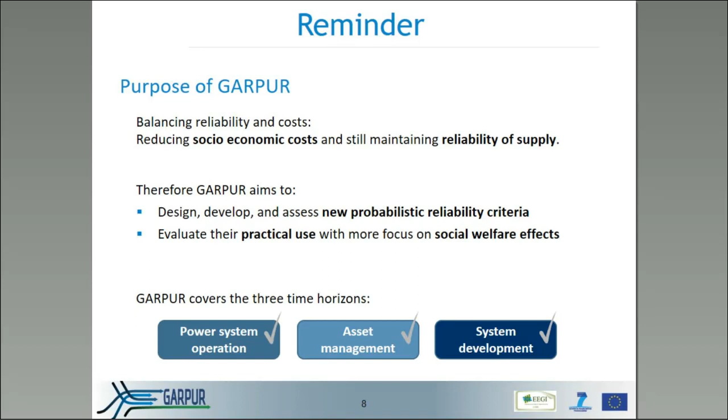I should also recall that the goal of GARPUR is to cover in a coherent way the three main types of contexts where reliability management is carried out by TSOs, namely power system operations, asset management, and system development. These problems span different time horizons, from very short-term real-time operation to rather long-term, for instance in system development.

This slide summarizes the overall approach of GARPUR. You see in the upper part the development of a probabilistic reliability management framework, and in the lower part the development of a socio-economic impact evaluation framework. This should be applicable over the three contexts I've just mentioned: system development, asset management, and power system operation.

In the project, we have developed new criteria and also a prototype quantification platform. One of the pilot tests, presented later on by Pascal, is based on using this quantification platform in order to compare, from a socioeconomic point of view, the N-1 classical reliability criterion used today in practice with the new probabilistic approach developed in GARPUR.

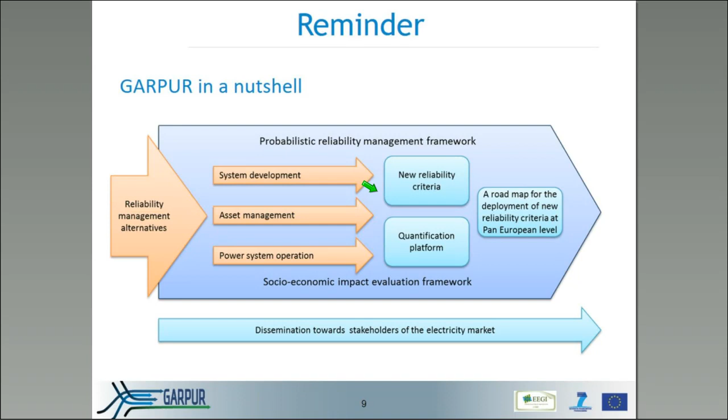Finally, based on these developments, the GARPUR project has developed a roadmap for the deployment of new reliability criteria at the pan-European level, and the last part of the presentation will focus on a very quick summary of that roadmap. So

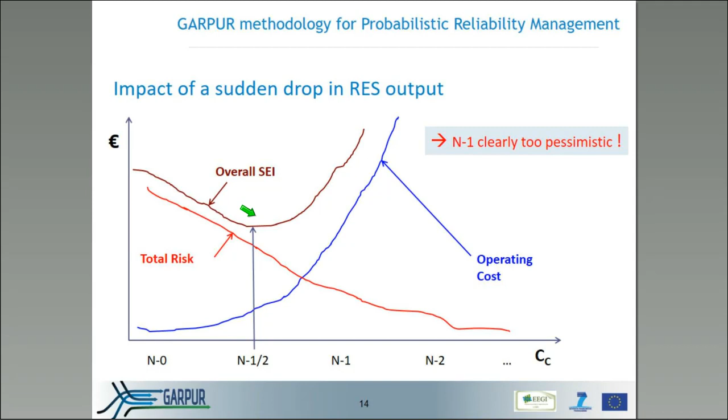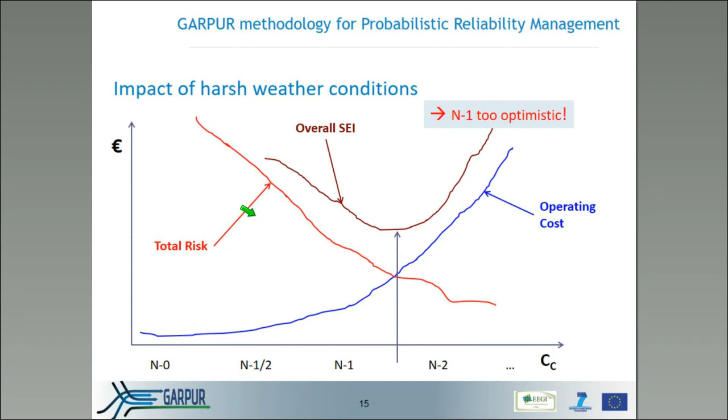And of course, in extreme weather conditions, the probability of multiple failures will increase, and also if there is an interruption, the consequences on the consumers who have no electricity will typically be worse if the weather is harsh than if the weather is mild, so that the total risk curve, the red curve, strongly increases, and in this case, the N-1 criterion would be too optimistic, and you should rather add more contingencies to reach this optimum trade-off. So the bottom line is that depending on the conditions, in some cases we should cover less contingencies than N-1, and in other cases more contingencies than N-1.

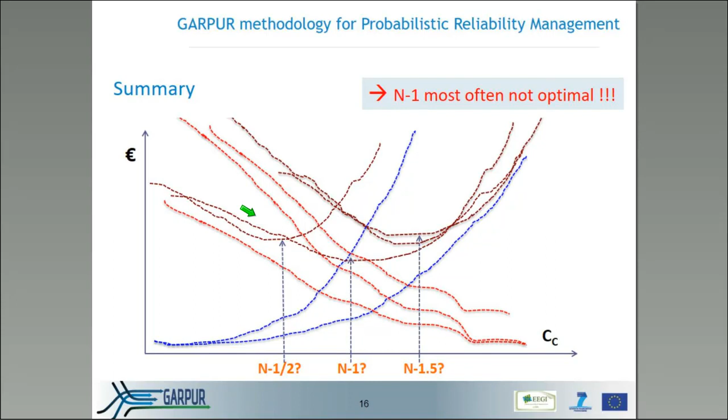So the GARPUR project has developed a coherent methodology which allows to do this in such a way that we approach this socioeconomic optimum. So the main conclusion is that we need to dynamically exploit all the information that is available in the particular context, for instance, in real time. And this information has to do with evaluating the socioeconomic cost of service interruptions, but also with probabilities of contingencies and other kinds of failure modes, hidden failures, for instance.

And also because in operation, more and more, there is a combination of preventive and corrective control used to operate the system, it's important to take into account the fact that corrective controls, which are taken just after the occurrence of a contingency, are taken under strong time pressure, and there might be some risk of failure of corrective control, so that even if everything was well prepared, the system is not able, in the end, to withstand the contingency. So that also has to be taken into account.

And various factors will influence these probabilities and these costs, like weather conditions, of course, operating conditions if the system is in more stressed conditions, and also the fitness of the assets of the system. If you have well-maintained transformers and lines, normally their failure rates will be smaller than if you have less well-maintained lines. And so this already shows that asset management, and maintenance in particular, may have an impact on reliability in operation, and this should be taken into account as well.

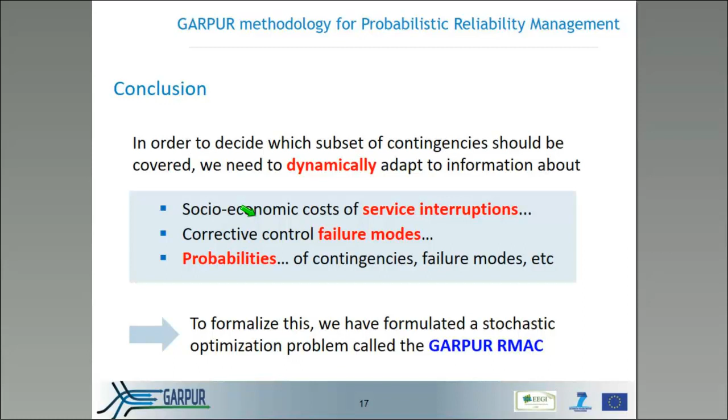Without going into any mathematical formulation here, which can be found in our many deliverables provided in the project, this led to the formulation of a series of stochastic optimization problems called the GARPUR RMAC.

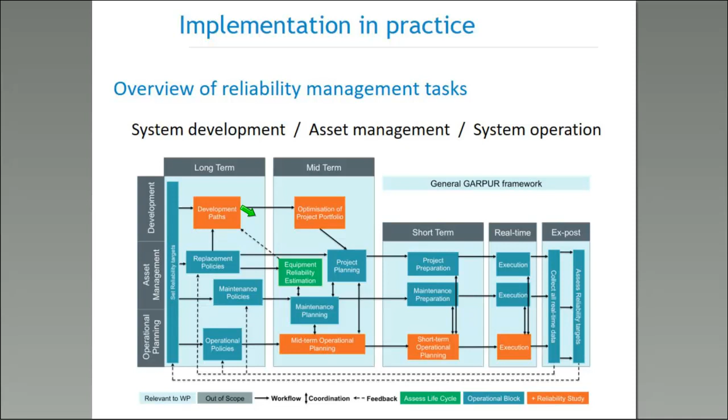These can be applied to the different problems that the TSOs have to solve, from system development, asset management, and system operation. I will discuss each one of these contexts and what problem is addressed.

Starting with system development, the main purpose is to identify transmission capacities needed in the future and justify how we propose to provide them through a careful cost-benefit analysis. What kind of additional line should be built, and what should be its capacity? The larger the capacity, typically the better from the market and reliability point of view, but the higher the investment costs.

The problem setting is that you look at a target year or series of target years over the future, say from 2025 to 2035. Then you screen the relevant future market and operating conditions over that horizon, identify possible bottlenecks in terms of market and reliability issues by simulating how the system would operate, and from there determine, thanks to the expertise of planning engineers and the results of these screening studies, whether and where to build new lines.

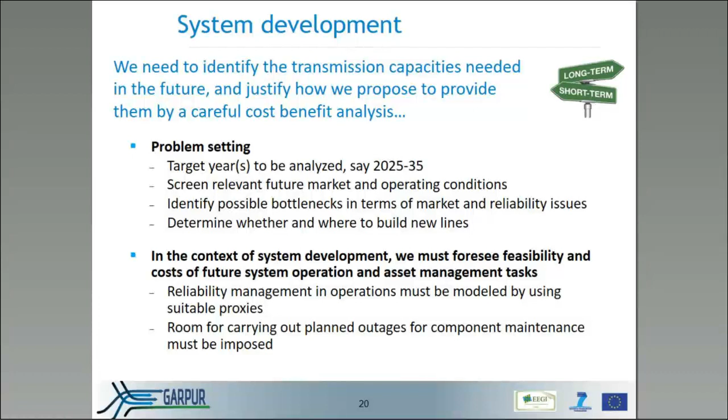When carrying out these system development studies, it's very important to model in a suitable way how the system would be operated over these future years and also how it would be maintained. In GARPUR, we do that modeling by introducing the concept of a proxy. I will come back to this during the next two applications.

Quickly, on asset management, which is a very important activity, especially because power system components come closer to their end of life. Most of the lines and transformers in the transmission system are already several tens of years old. So it's quite important to analyze how much and where to invest in maintenance and replacement - how often should we do the maintenance and where should we do it in the best way, and also the replacement of some of the older equipment.

Once you know how much of these activities you want to plan for the future, maybe 10 or 20 years ahead, you also have to be able to carry them out, which means taking some equipment out of operation for maintenance or replacement activities. While these activities will, after being carried out, typically increase the reliability of the system, during the outage the reliability level of the system goes down.

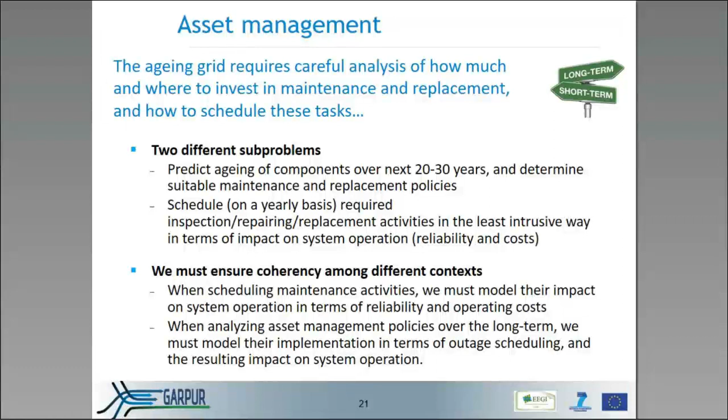And finally, the last class of problems on which we have, of course, worked concern system operation, where the question is to take decisions in operation planning maybe a few hours or a few days ahead in time, up to real time. And in this case, the point is to optimize the balance between operating costs and the risk of power supply interruptions, as I have explained in my first set of slides with my 3 types of curves.

And so here we have looked at 2 sub-problems: the real-time operation problem, where the point is to take into account current operating and weather conditions to evaluate risks of power supply interruptions over a relevant set of possible contingencies and to mitigate them. And in look-ahead mode, operation planning, where the point is to prepare real-time operation to ensure robustness with respect to uncertainties in load, renewable in-feed, market, and weather conditions.

So there, in look-ahead mode, you can still postpone some maintenance, some outages planned for maintenance, or you could possibly reduce the capacities given to the market if you think that the weather conditions will be extreme and it is better to reduce a little bit the distance from generation to consumption.

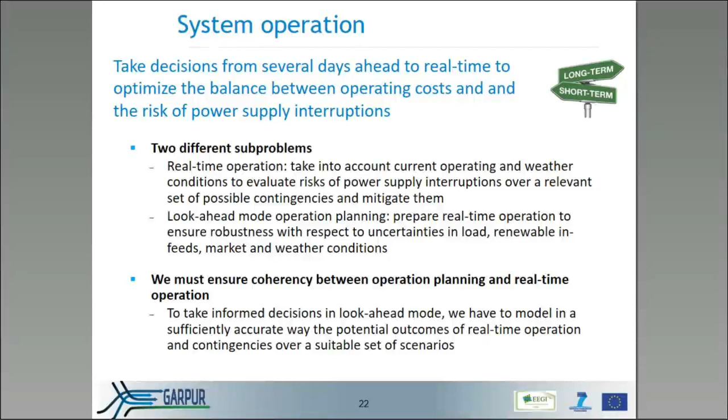So this finishes my introduction with the following slide, where these different Russian dolls basically represent the different contexts. Let's say from the extreme right part, where we have the automatic response of the system, and then we have real time going progressively towards the left part of the slide. Real-time operation planning, maybe midterm outage scheduling, and so on.

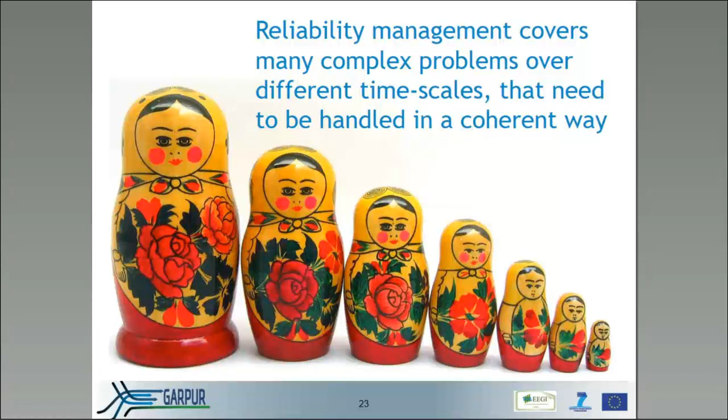In this webinar, I will quickly go through the results of the Landsnet pilot test by answering these 3 questions. So is the computation fast enough? Does the output make any sense? And how sensitive are the outputs?

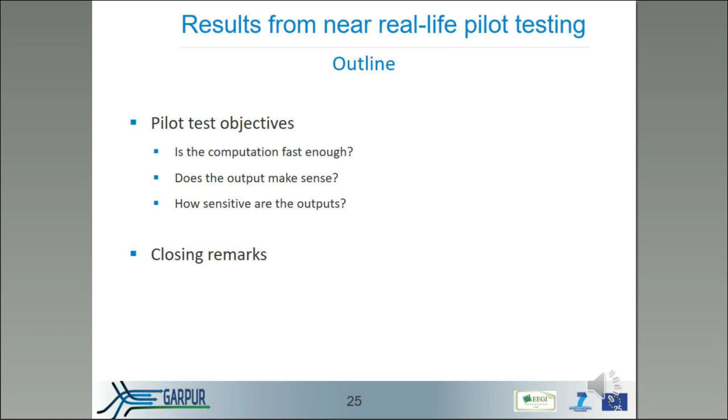Description of the pilot test implementation and methods can be found in detail in the first webinar of this series. But here is a short overview of the Icelandic system and the model. The Icelandic system is small and thus manageable for a pilot test like this. The model we used contains 85 buses, 107 branches, 71 generators, and it has 65 loads.

The pilot was programmed with performance in mind from the start, but not maybe optimized, since we felt it was more important that it would work and be simple to debug and validate the outcome. The pilot was built in MATLAB using MATPOWER and IPOPT, with additional auxiliary tools made in Python, and outputs and displays written in HTML and JavaScript.

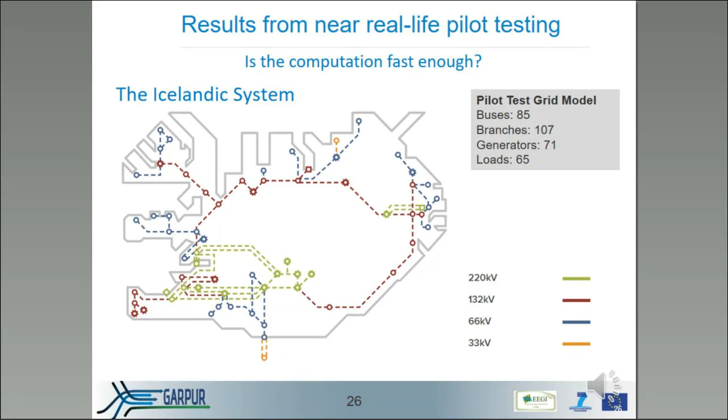For computation, we used a normal desktop computer. Here are the specs for the computer we used. It has 10 cores and a larger memory, but we can say it's a reasonable personal computer.

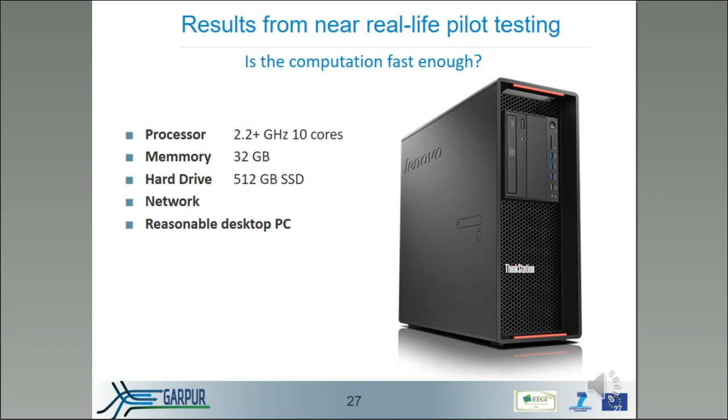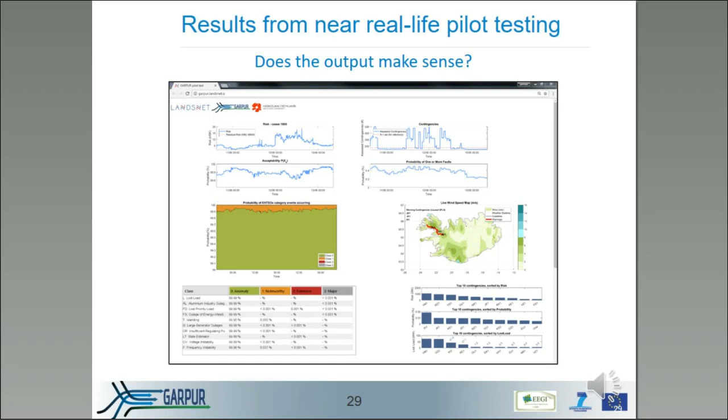To visualize the outputs, we developed an internal web page which is accessible for everyone within Landsnet. When we started this pilot test, we really didn't have a good feeling of how to represent the outputs in a meaningful way to the operators, and it was difficult to view this picture quickly. And after a while, we found that the best way was this graph here, for realizing the present state of the system.

The y-axis shows estimated interruption costs, and x-axis hourly contingency probability, with risk as contours on the graph. The map shows the 10 worst contingencies, and it's really easy to compare each one of the contingencies and see where you're at each moment. And here the operator can see the impact of, for example, an incoming storm, where the blocks start to move to the right on the graph.

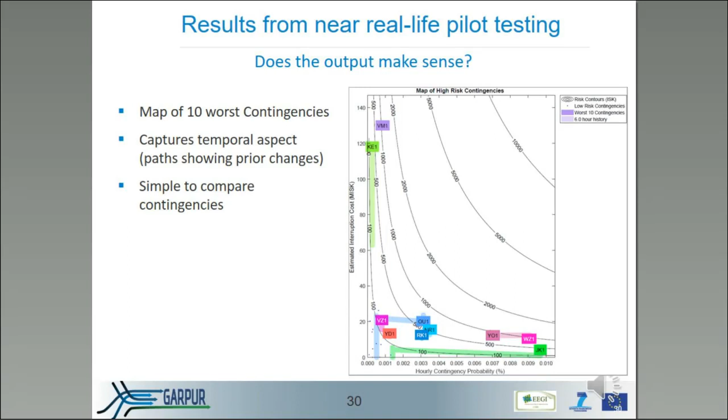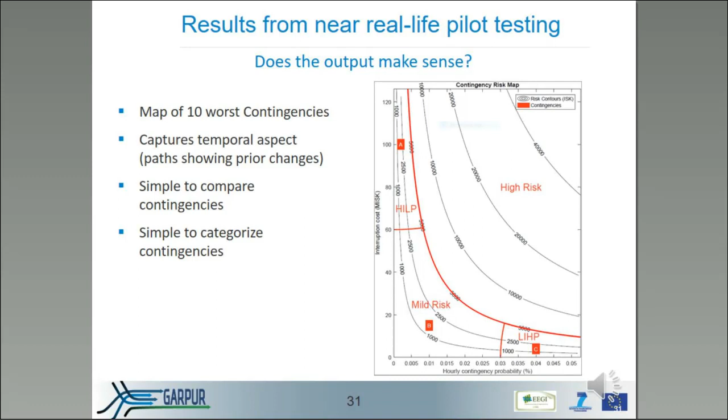This figure is the same as the previous one, but it shows how you can sort of categorize the contingencies that you have and see if it represents what you feel for each one of them. If you know that something is rare and has high impact, it should be in the box marked with A, high impact, low probability. And if it would move to the right into the high risk zone, you might want to check in on that.

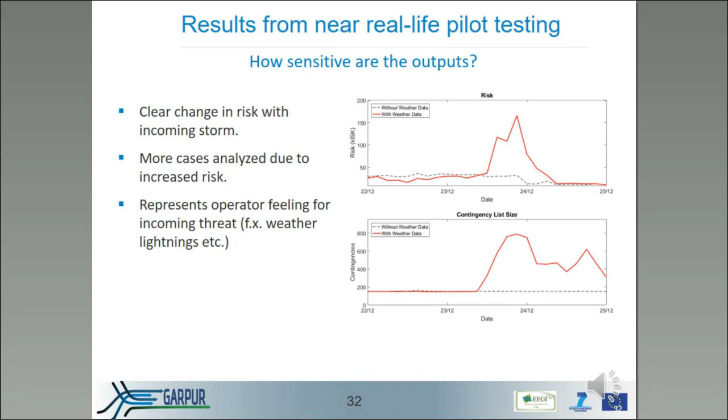On this graph, we can see how the pilot responds to weather data compared to no weather data, weather being the largest threat to the Icelandic system. For this graph, there's an incoming storm, and the probabilities of a contingency increase and the risk increases, and so the pilot analyzes more cases. And we feel that this represents what the operator is thinking in the control room, and from experience he knows that it's more likely for things to happen in storms than in calm weather.

And we also compared the risk with and without system integrity protection schemes. In our system, we have a couple of those schemes in place. We found that in some cases the risk was greatly overestimated if they were not taken into account. This graph shows an example of such comparison, where the orange lines show the risk without system integrity protection, and the blue line with it.

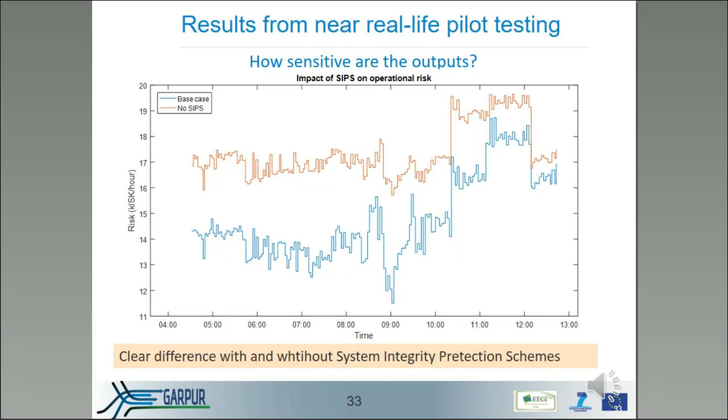The pilot showed that this can be done. This can be calculated for near real time, without using huge computers. The output represents the operator's feel for the system and impacts of threats. And in most cases, the outputs agree with experts, but we admit that we still have some bugs and we sometimes have something weird going on. We see that there's a need to validate the individual modules of the pilot test and of the methods proposed in GARPUR. And for future implementation, there's a need for a fast estimation of dynamic events.

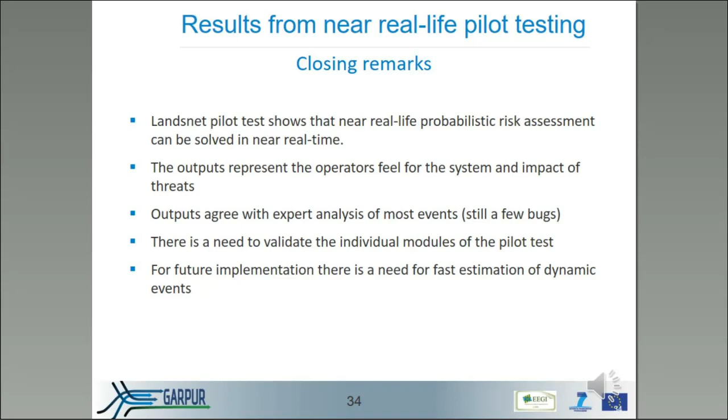So I will present you the RTE test case study using the GARPUR quantification platform prototype. So first, the pilot test objectives, then the GQP main features of the test, and the test and closing remarks.

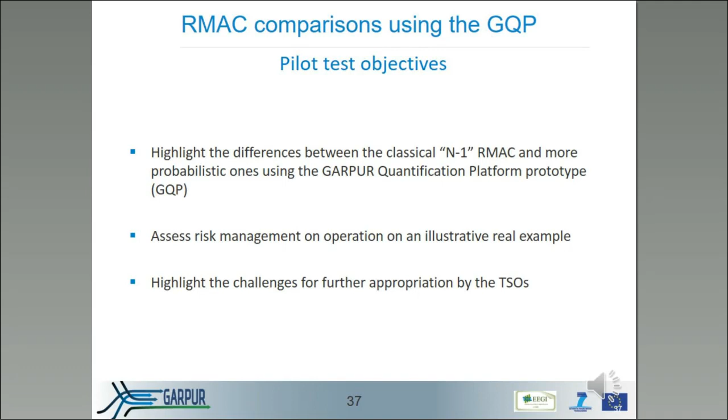The pilot test objectives were to highlight the differences between the classical N-1 reliability management criteria and the more probabilistic ones using the GQP, and to assess risk management in operation, on an illustrative real example, in order to highlight the challenges for further appropriation by the TSOs.

Regarding the problem considered, we are dealing with congestion flow management in the southeast region of France, and we focus more precisely on the so-called Tavel-Réaltor corridor, which has been responsible for 2/3 of RTE congestion costs in 2013, and we will look at risk management, day-ahead decisions versus real-time decisions.

Today, the present operating rule is that we take into account preventively the N-2 Tavel-Réaltor, but this depends on weather conditions, for example, if we anticipate storms or fires in summer.

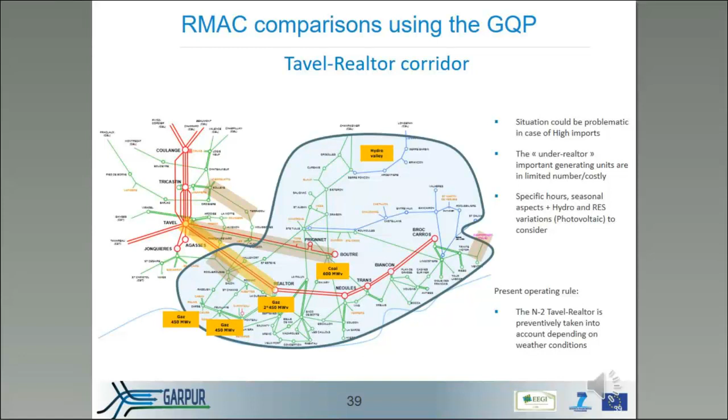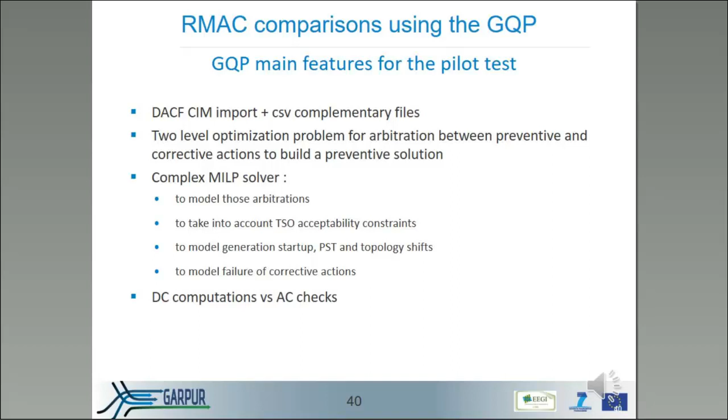The computations are done using the DC, direct current, approximation, but there are AC checks in order to validate those computations performed in DC. So we use the three-step approach provided by the GQP. So first, we build a preventive solution for a specific RMAC and a specific set of contingencies. This is based on the best forecast, which is given by the DACF file.

And then we use uncertainties we have around the forecast in order to build real-time preventive adjustment of the day-ahead preventive solutions. And we finish by a last stage corrective problem, which is performed on a larger set of contingencies. So when we sum up the three costs, the day-ahead preventive cost, the real-time preventive cost, and the last one, the corrective cost, we have the total cost quantification which is associated to the RMAC.

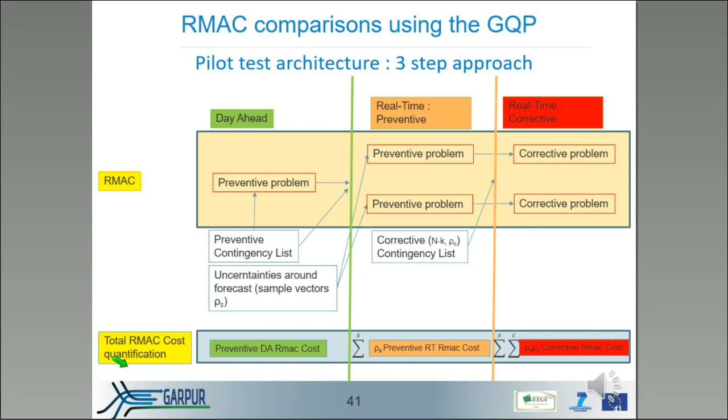For comparison, we have defined four RMAC comparative problems, which are the N-0 problem, so we don't consider the contingencies to build the preventive solution. The classical N-1 problem, only N-1 contingencies are considered to build the preventive solution, but with the same probability and without authorizing a trade-off between preventive and corrective actions in order to build the preventive solution.

And we have also two statistical RMACs. The first one, which is called RMAC N-1, and in this one we consider only N-1 contingencies, but we use their probabilities, and we authorize the trade-off with corrective actions in order to find preventive solutions. And we have also a RMAC N-2 problem, which is similar but with the addition of N-2 contingencies in the problem in order to build the preventive solution.

And we finish for all the RMACs by the same last stage corrective problem, which is identical, which gives us the residual risk estimation considering the effect of a preventive solution.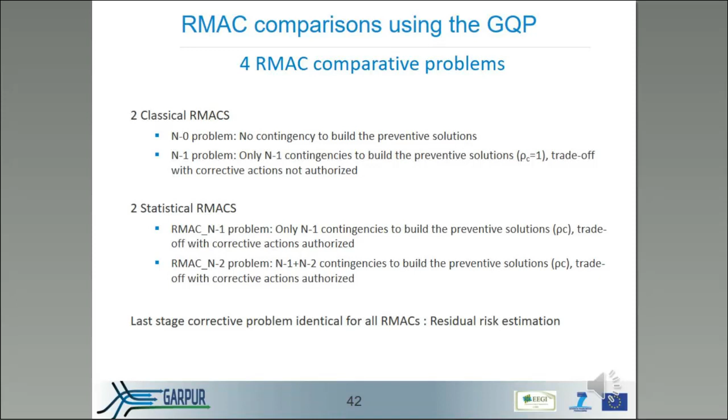So we have defined first a base case parametrization in order to compare the four different RMACs on a fair basis, and then we have performed complementary sensitivity tests in order to highlight the impact of the contingency failure rates, the uncertainties around the forecast, the TSO acceptability constraints, and failure of corrective actions impacts, control actions, plus more N-K contingencies to be put into the problem.

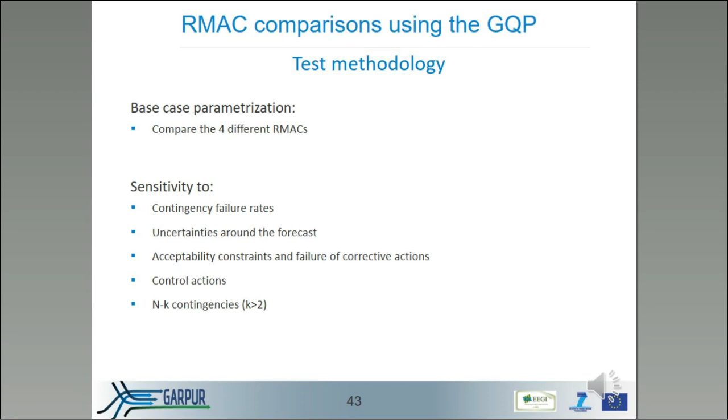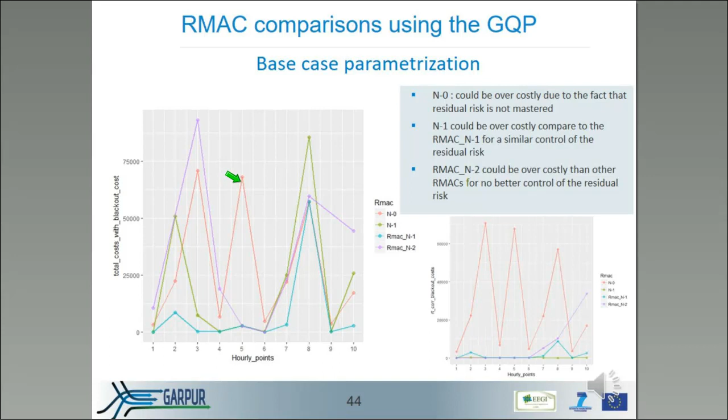On the base case parametrization test, we have put into evidence the fact that the N-0 problem could be over-costly. This is due to the fact that the residual risk is not mastered for this problem. If we compare now the N-1 problem in green to the RMAC N-1 problem in blue, we can see that the N-1 problem could be over-costly compared to the RMAC N-1 problem, and this for a similar control of the residual risk. But the RMAC N-2 problem is more costly than other RMACs for no better control of the residual risk.

If we look now at the tests which have been performed on sensitivity to contingency failure rates, we have multiplied the failure rates by 10 in order to simulate the effects of adverse weather conditions. So we can see that the N-0 problem, which is normal, is getting worse. For the RMAC N-1 problem, we can see it tends to mimic exactly the N-1 problem, which was expected. The RMAC N-2 problem is always over-costly for not a better control of the residual risk.

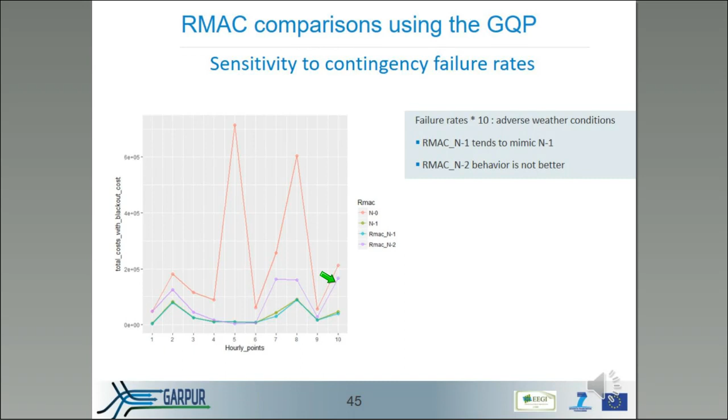So to finish, I will say that there are some sensitive issues to consider in order to perform such studies. We have used the GQP, which was a research-grade prototype, and you have to consider performance and tractability issues, but also result interpretation and validation.

It could also be interesting to deal with a more complex RMAC implementation, such as taking into account uncertainties in the day-ahead preventive problem, taking into account larger problems, taking into account reactive and dynamic phenomena, and also multi-TSO interactions.

Regarding the data, we have observed a high sensitivity of the RMAC to the blackout costs, the failure rates, and failure of corrective actions. And we think that if we can reach a better confidence in the estimations of those three parameters, it will ease further acceptance of the RMAC by the TSOs.

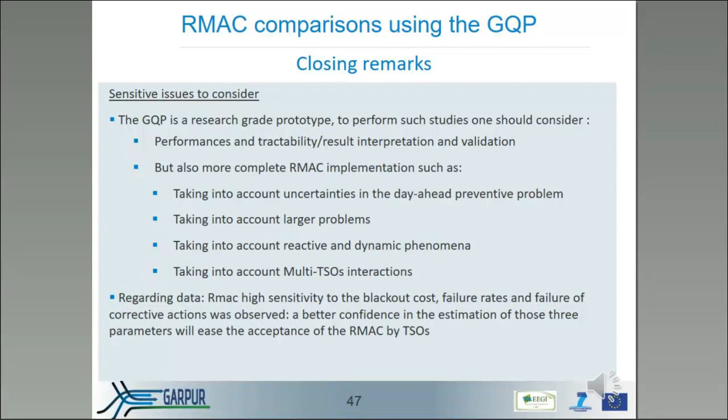And regarding the benefits of the approach, we can say that the RMAC N-1 problem is well positioned and is consistent with intuitions. Regarding the introduction of N-K contingencies, N-2 or N-3 contingencies in the preventive problem, they should be economically weighted and justified. But we can also say that high preventive costs could be justified in case of difficult operational conditions.

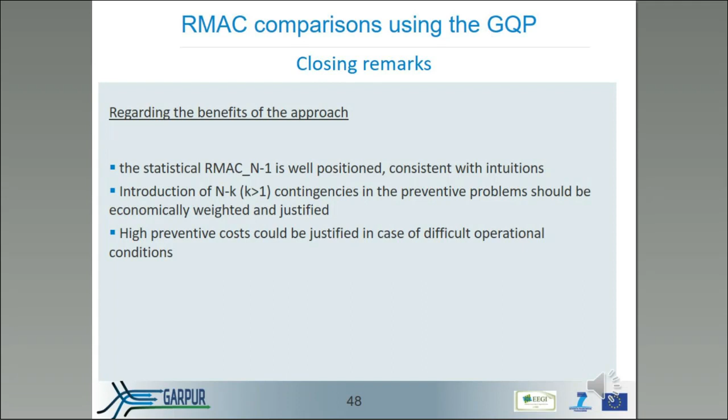I will talk to you about the result of a pilot test case for system development. So the goal of this test case is to integrate in the tools used by ELIA the approach developed in GARPUR, and to compare this approach with the current approach used by ELIA. The most important aspect is the screening of operating states.

The challenge in the system development context is that we have no certainties on the evolution of regulatory frameworks, on the fuel price, or on the generation mix and localization. So it's necessary to consider all likely futures, and the exploration of several futures requires generating a lot of operating states. But after generating these operating states, it's necessary to have a methodology to assess the robustness of the network for each of these operating states.

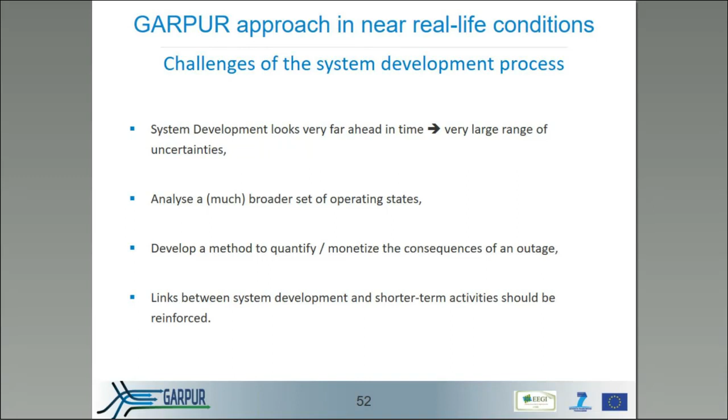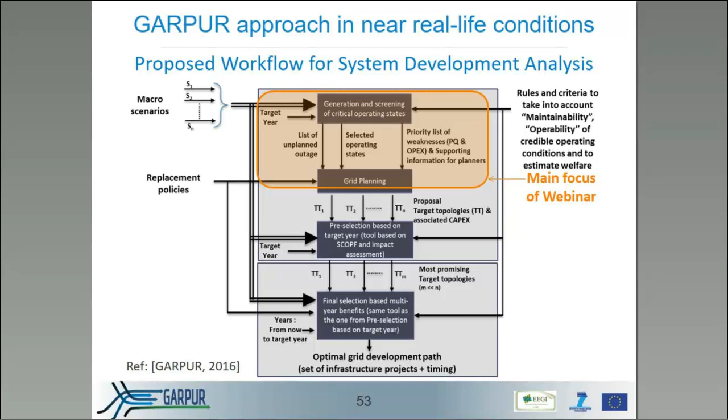For the first step, for the reduction of the number of credible operating states in ELIA, for the regional study, for example 70 kV, we chose only 5 operating states to cover extreme situations, for example peak load and no decentralized production, or the opposite, low load and peak of decentralized production. But for the European studies, in extra high voltage, we chose 100 operating states.

The main idea behind the selection method is that the duration curve for each of the inputs must be adequately covered, as shown in the figure in this slide. In the GARPUR project, we use the K-means algorithm in the software MATLAB for regional and European studies and so on.

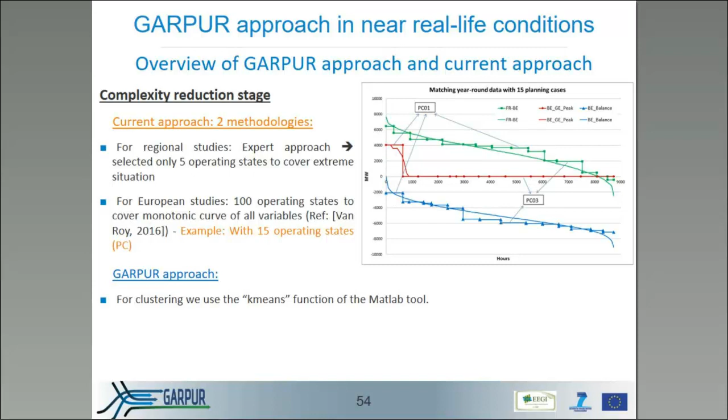For the second step, we find the critical operating states. Actually, in ELIA, we perform a security analysis for all N-1 situations, but we don't estimate the cost to solve the constraints. And all operating states that have constraints are kept for more accurate evaluation by the planner.

In the GARPUR approach, we use a security constrained optimal power flow called OATS, developed by the University of Strathclyde. OATS makes it possible to calculate the cost necessary to avoid constraints in N and N-1 situations. All the operating states that have operating costs are kept for more accurate evaluation.

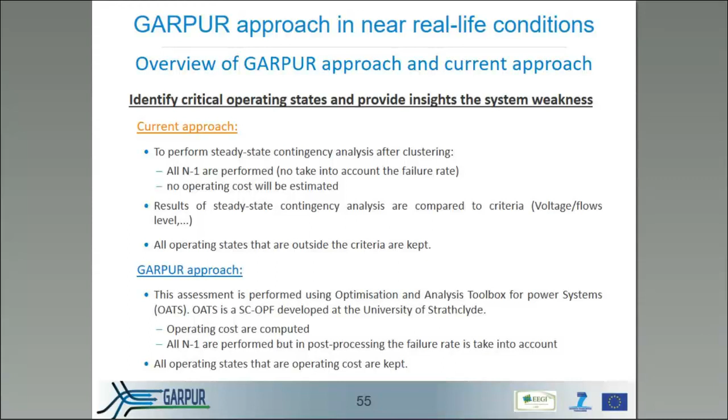These two approaches for these two steps are tested on this network. This network has 8 70 kV substations. The needs of this network are the end of life of the 70 kV line and to integrate the wind production, because here the potential of wind is equal to 400 MVA.

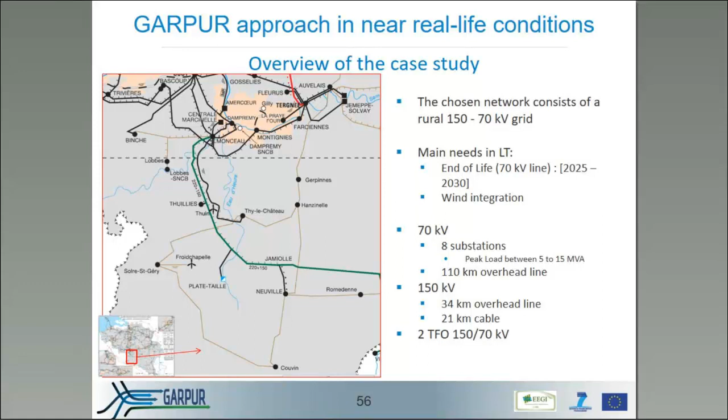Before presenting the comparison, I show you the results of the security constrained optimal power flow on the full data set for 1 year. And so here 14% of operating states are insecure. These points are secure if you curtail the wind production, but this curtailment generates an operating cost of 414 kilo per year, and this cost takes into account the probability of having an N-1 situation.

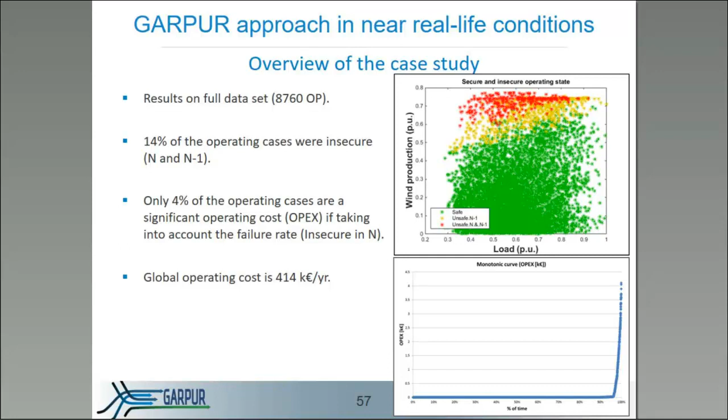The main difference is linked to the representativeness of the central point of the cluster. And for the K-means algorithm, the representativeness is better compared with the ELIA approach.

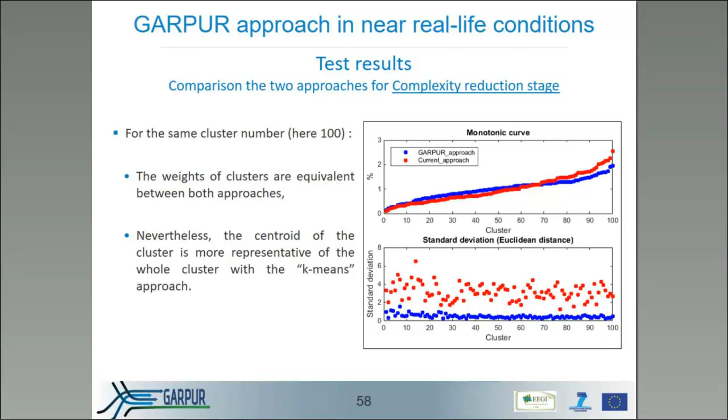And if you go to the comparison with step 2 to identify the critical operating states, if you take 100 clusters, the two methods give an almost equivalent number of critical centroids to be analyzed by the planner. But it's important to note the method used by ELIA overestimates the operational cost, whereas the K-means algorithm leads to an underestimation of the operational cost, and you find the relative error in this table.

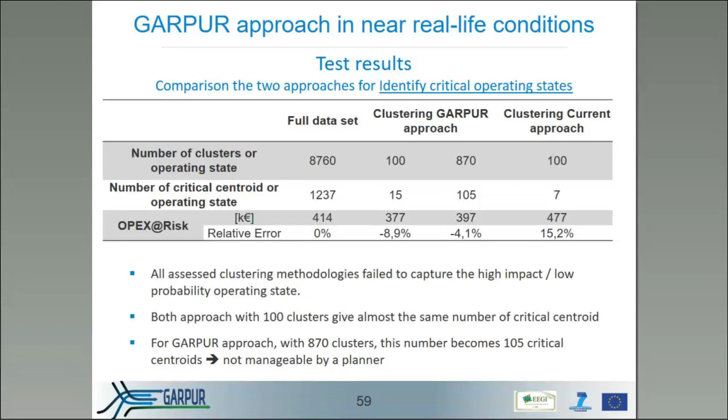In conclusion, one final element is the K-means algorithm is faster compared with the ELIA method. In conclusion, the K-means algorithm is a plausible alternative to the current method, and it's used in ELIA since the beginning of September. And the whole pilot test case has shown that the method developed under work package 4 in the GARPUR project can be used within the TSO business.

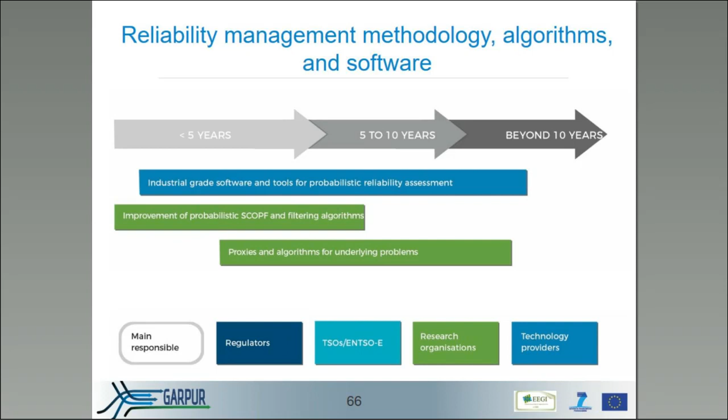And of course, in the project we have developed a certain number of prototype software like probabilistic approaches and reliability assessment methodologies, as you have seen. But of course, this software now has to become mature, and therefore we need also investment from technology providers and further progress in terms of research as well.